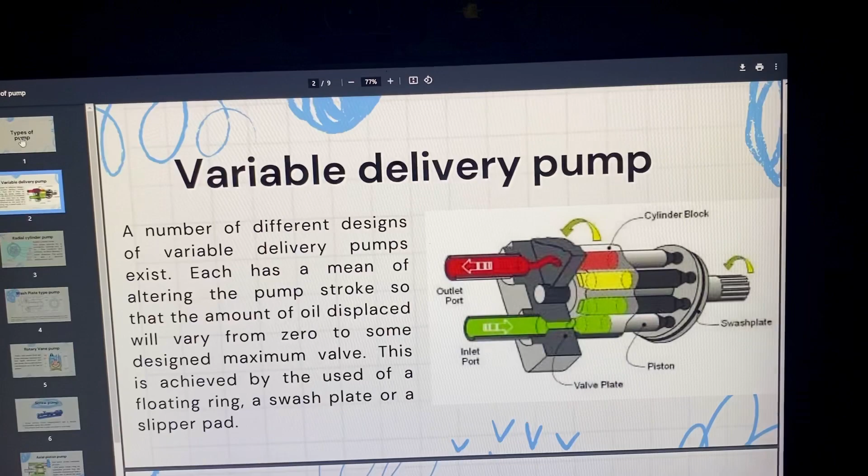Next is radial cylinder pump. Radial cylinder pump, this pump provides for a constantly rotating unit, a no-flow condition, and infinitely variable delivery in either direction. The pump is also a positive displacement unit.

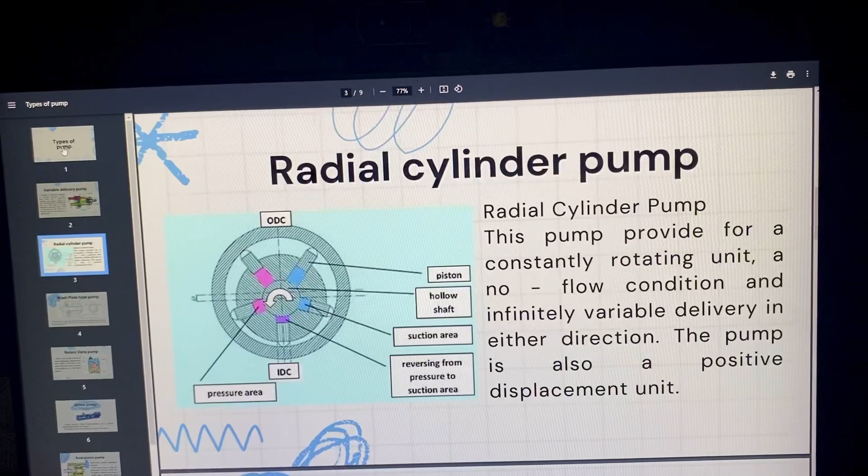Next pump is the swash plate type pump. This pump has a circular cylinder block with axial cylinders disposed on a pitch circle around a central bore, which is machined with splines to suit the input shaft which revolves.

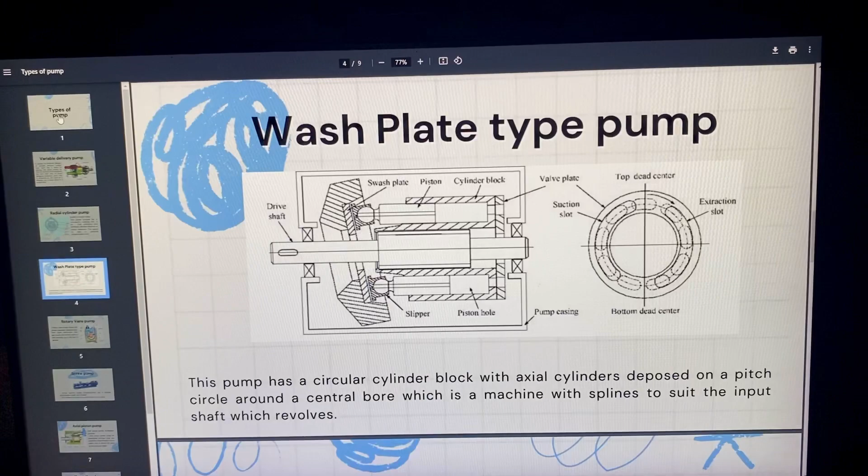Next is rotary vane pump. Rotary vane pumps, fixed and simple adjustable displacement, have higher efficiencies than gear pumps, but are also used for mid pressures up to 180 bars in general.

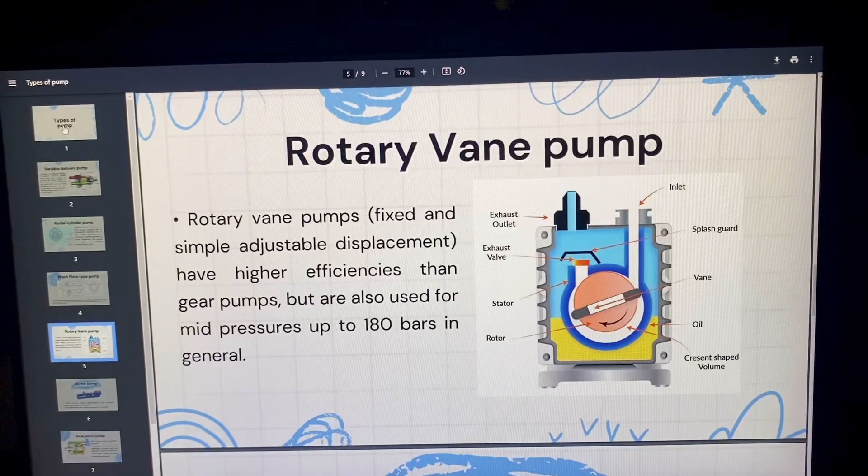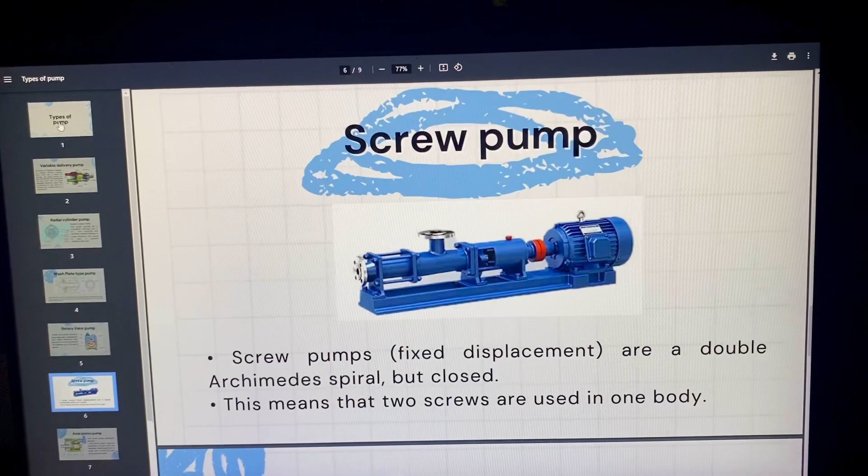Next one is screw pump. Screw pumps, fixed displacement, are a double Archimedes spiral but closed. This means that two screws are used in one body.

Next is axial piston pump. Axial piston pump, swash plate principle. Axial piston pumps using the swash plate principle, fixed and adjustable displacement, have a quality that is almost the same as the bent axis model.

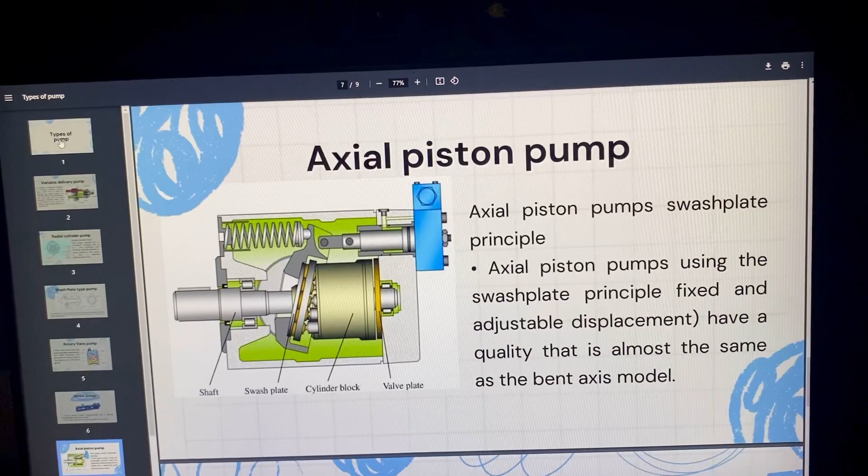Next is the centrifugal pump. A centrifugal pump is a mechanical device designed to move a fluid by means of the transfer of rotational energy from one or more driven rotors called impellers.